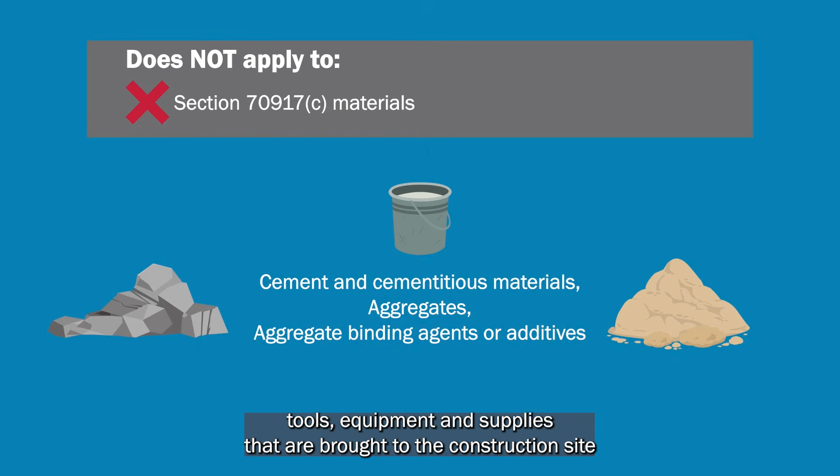The Build America, Buy America Act applies to articles, materials, and supplies that are consumed in, incorporated into, or affixed to an infrastructure project. It does not apply to Section 70917C materials, tools, equipment, and supplies that are brought to the construction site and removed at or before the completion of the project, or building equipment and furnishings, such as movable chairs, desks, or portable equipment.

The classification of a product is determined based on its status at the time it is brought to the project site for incorporation into the project.

This video will discuss the categories of products subject to the Build America, Buy America Act, as well as one category that is exempt by law, by answering these five questions: What is considered an iron or steel product? What is considered a construction material? What is considered a manufactured product? What are Section 70917C materials? And where can you find more information about the Build America, Buy America Act?

Now, let's discuss the first question. What is considered an iron or steel product under the Build America, Buy America Act?

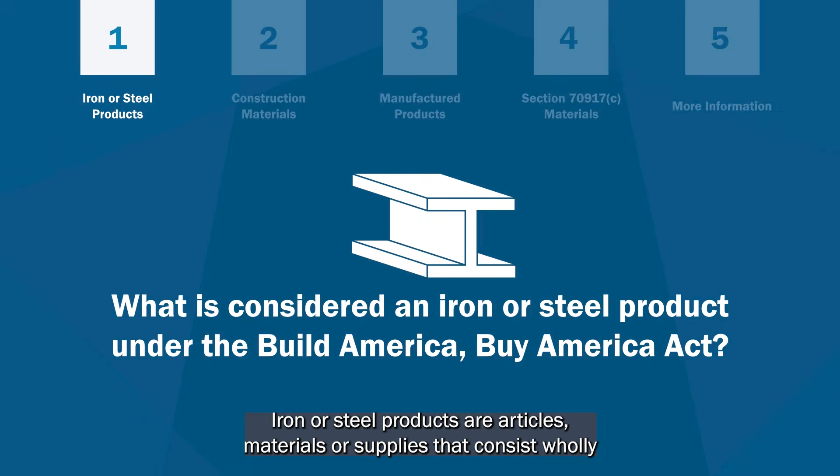Iron or steel products are articles, materials, or supplies that consist wholly or predominantly of iron or steel, or a combination of both. A product is considered iron or steel if the cost of the iron and steel content exceeds 50% of the total cost of all of its components.

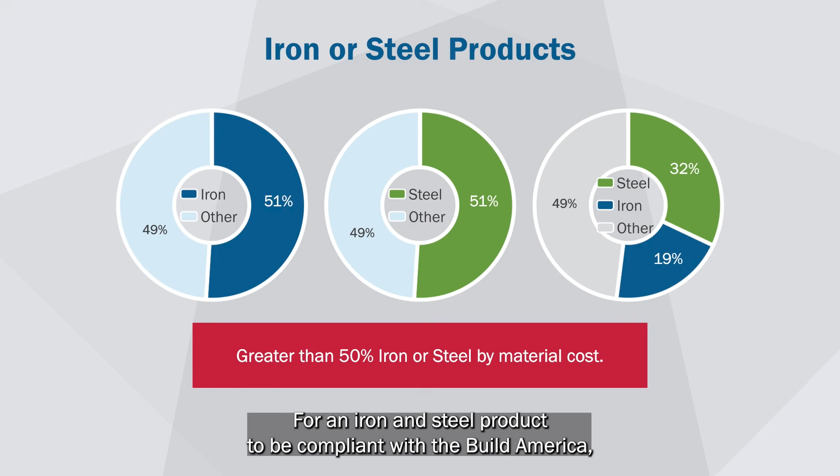For an iron and steel product to be compliant with the Build America, Buy America Act, all the iron and steel used in the product must have been made in the U.S., and the final product must have been manufactured in the U.S., from the initial melting stage through the application of coatings.

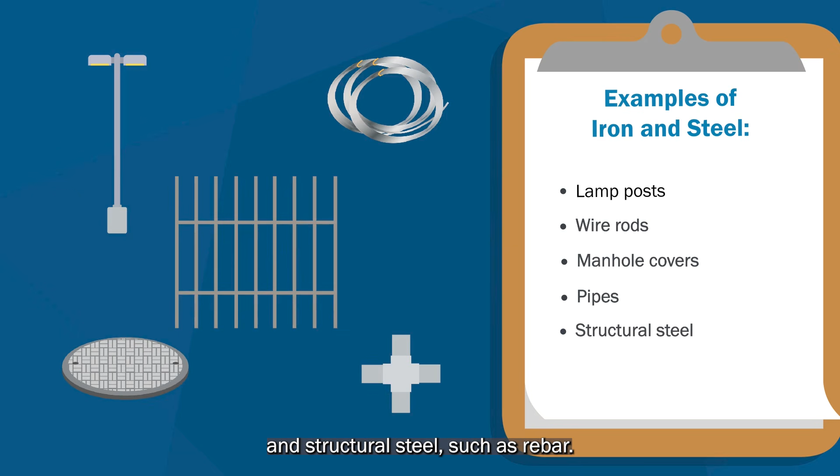A few examples of iron and steel products include lampposts, wire rods, manhole covers, pipes, and structural steel, such as rebar. Now, let's move on to the next question.

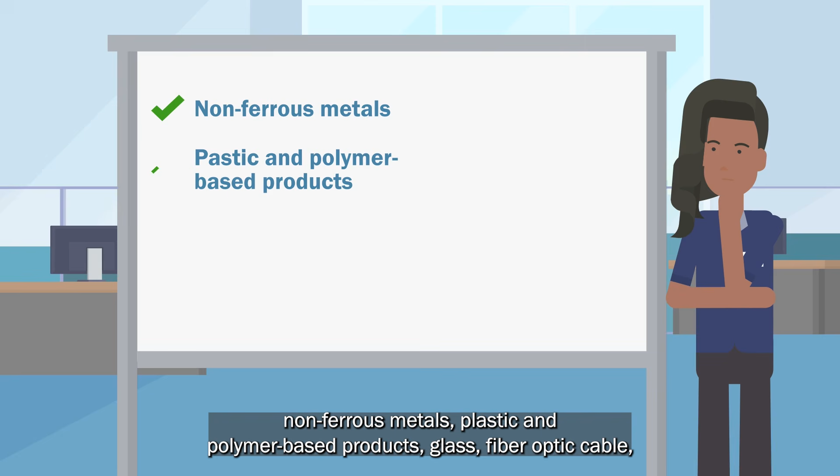What is considered a construction material under the Build America, Buy America Act? Construction materials are articles, materials, or supplies that consist of one or more of the following items: non-ferrous metals, plastic and polymer-based products, glass, fiber optic cable, optical fiber, lumber, engineered wood, and drywall.

Minor additions of articles, materials, supplies, or binding agents do not change the categorization of the product as a construction material. Now, let's move on to the third question.

What is considered a manufactured product under the Build America, Buy America Act? Manufactured products are articles, materials, or supplies that have been processed into a specific form and shape, or combined with other articles, materials, or supplies to create a product with different properties than the individual articles, materials, or supplies.

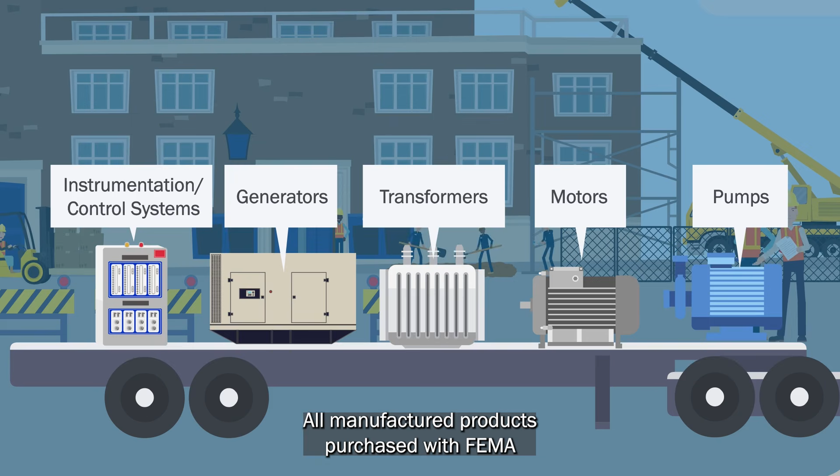If a product is not primarily iron or steel, or not listed as a construction material, it is likely a manufactured product. Examples of manufactured products include, but are not limited to, pumps, motors, transformers, generators, and instrumentation or control systems. All manufactured products purchased with FEMA financial assistance must be produced in the U.S.

This means that the cost of the components of the manufactured product that are mined, produced, or manufactured in the U.S. must be greater than 55% of the total cost of all components that make up the product.

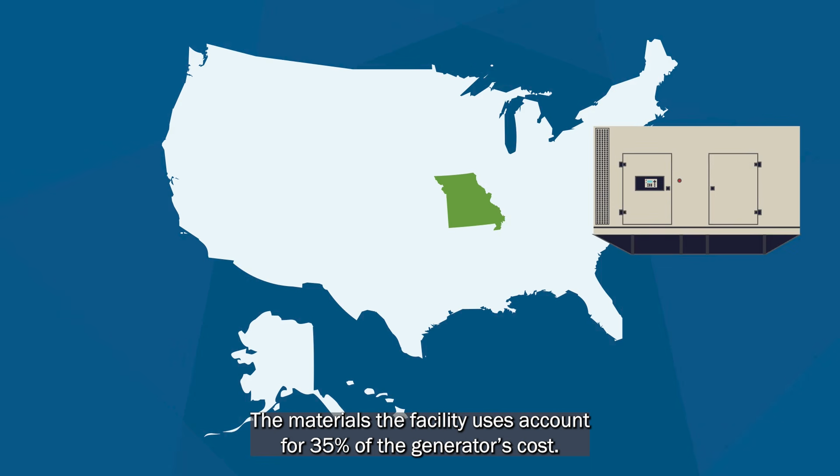An example is a manufacturing facility in Missouri that produces generators. The materials the facility uses account for 35% of the generator's cost. Another 30% of the cost is incurred at a facility in Oregon, and the remaining cost of the components is sourced from a facility outside the U.S.

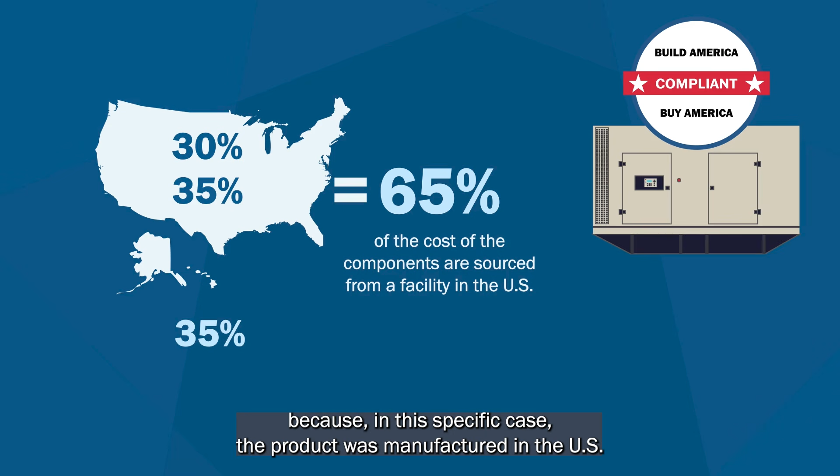Once complete, the generator is considered a Build America, Buy America Act compliant product because, in this specific case, the product was manufactured in the U.S. and over 55% of the cost of the components were produced in the U.S.

Next, we will discuss the fourth question. What are Section 70917(c) materials?

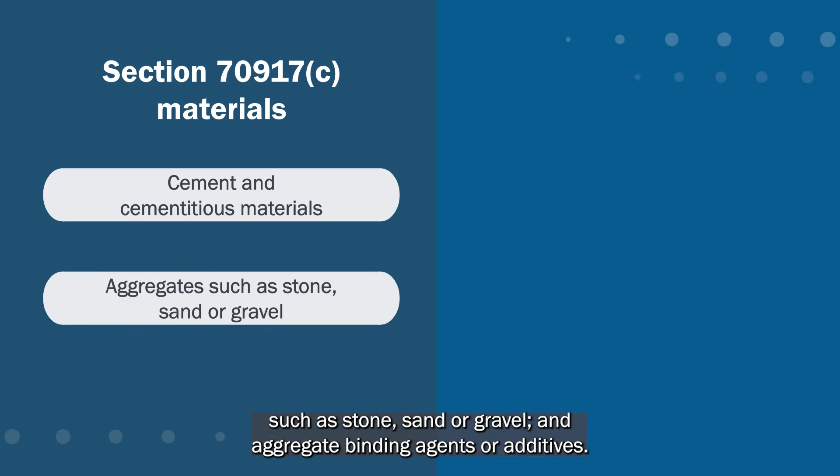Section 70917(c) materials, named after the corresponding section of the Build America, Buy America Act, refer to a list of items which are specifically exempt by law from the domestic preference requirements. These include cement and cementitious materials, aggregates such as stone, sand, or gravel, and aggregate binding agents or additives.

Now, let's discuss the last question. Where can I find more information on the Build America, Buy America Act?

You can find information on FEMA's implementation of the Build America, Buy America Act on our website, located under the Buy America Preference tab on FEMA.gov. This website includes a list of all FEMA grant programs subject to and not subject to the Build America, Buy America Act. You can also find more program definitions, flyers, and a helpful decision roadmap.

The Code of Federal Regulations website provides more information on the Build America, Buy America Act policy under 2 CFR Part 184. Thank you for watching this video on the Build America, Buy America Act categories of products.